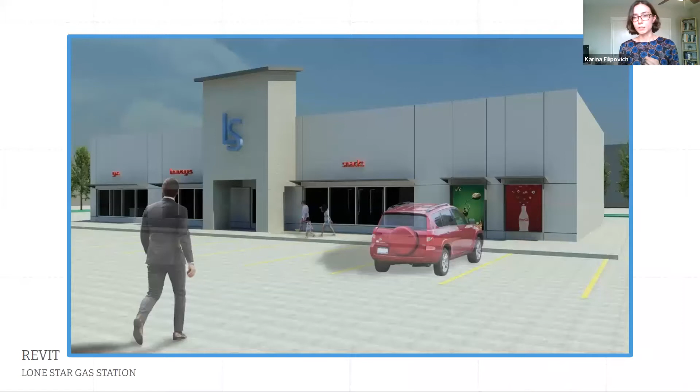And I want to show you guys a little bit of the work I was doing while I was at Lone Star. These are 3D models that are rendered, and a lot of the things I was doing was learning building design, drafting, learning about construction details and plans preparation for construction for like houses, and you see things like this, like gas stations. My goal was to eventually become an architect.

This was just something I was obsessed with, and I loved doing these kinds of things. These models that you see here are what we call BIM models - BIM stands for Building Information Modeling. They're actually the future of construction. The reason why is because these models allow you to create ahead of time what the structure or building or whatever you're trying to construct is, ahead of time, in your computer. And by doing that, you can catch mistakes ahead of time.

So for example, in a building, if you are modeling the building, creating this 3D model, you can also put in that model the ductwork, any kind of plumbing system that you need, what's going to go into the walls. And you can do clash detection with those BIM models. That's been really useful for architects and for contractors. When I say contractors, that's what we refer to people who actually construct and build whatever it is that we need to build - it's a very important job.

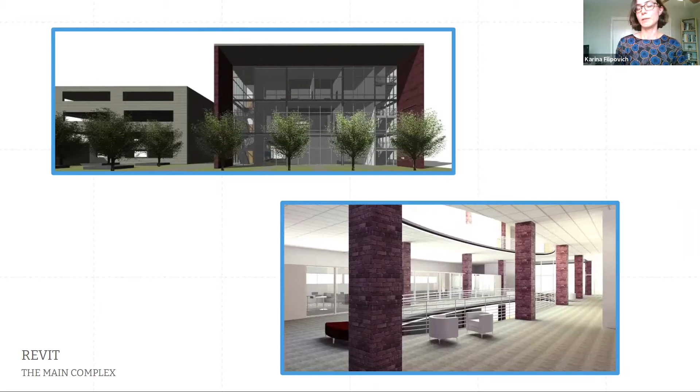So contractors out in the field know ahead of time what to look out for, and we can find those mistakes ahead of time. Now, when it comes to civil engineering, it's similar, but these pipes are in the ground, and you can create models of roads and bridges, which I'll show you a little bit later. So it's the future. These are not the most impressive things you can do with this software, but at the time, it was really eye-opening to me and so much fun. I love doing these things, I love making models, I love using computer programs, I love the challenge it brings.

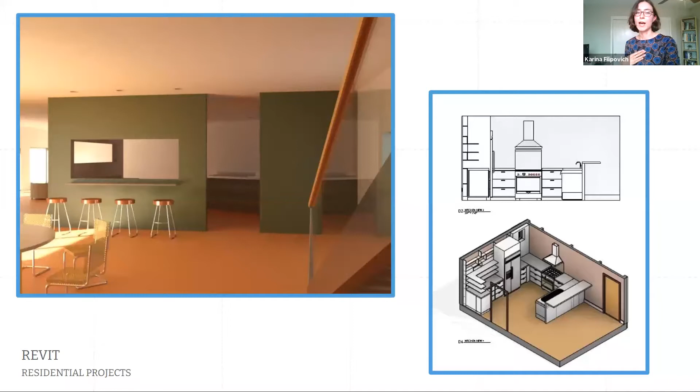So I thought I wanted to be an architect. I was preparing myself to apply to schools of architecture at the University of Houston main campus and Prairie View A&M. They have a beautiful College of Architecture there. So these were the options I was weighing at that point in my life.

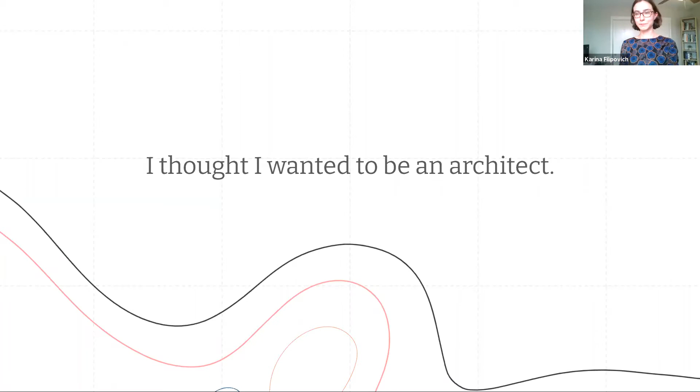I was finishing my classes at Lone Star, and suddenly I came across this class that was required for me to graduate. It's called statics. This is considered an engineering course, or at least an introductory one. I had never taken anything like this in my life. I wasn't sure why I had to take it. I never heard of it.

But the professor teaching that class, that one summer I had to take it, was one of the best teachers I've ever had in my life. He really held my hand through this class. It was like a 5-person class. He would sit down next to me at the desk and say, okay, what are you confused about? Let's do this right now together, we'll go through these problems together. And because of this class and because of that teacher, it's the reason why I'm standing here talking to you today. If I didn't have an experience like that so early on, I wouldn't have continued to study engineering.

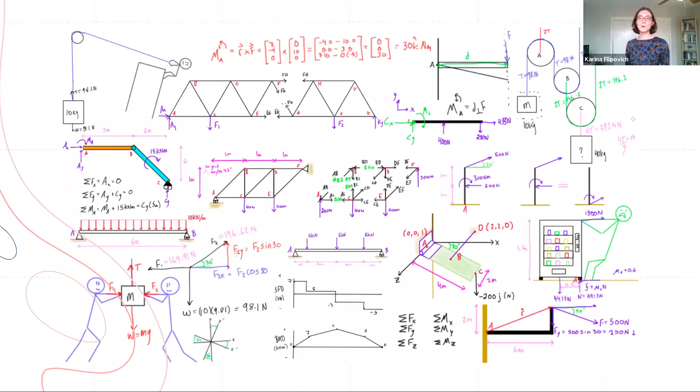Then I went to UHD, and this is the only picture I have of that time. Just kidding, but I went on to study structural analysis and design at UHD.

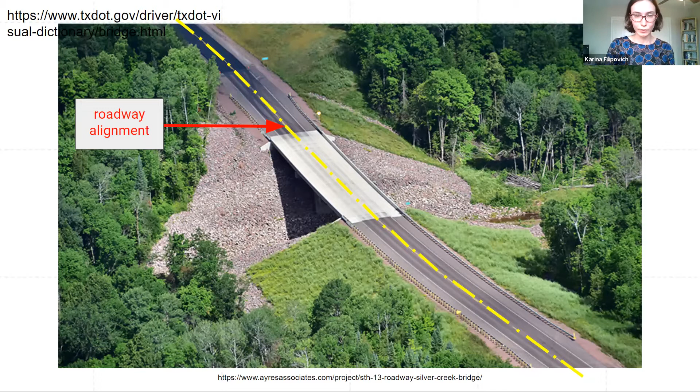And now we're going to go into this bridge. Let's see if I still have control here. Okay, I recreated this image for all of you in a drafting program.

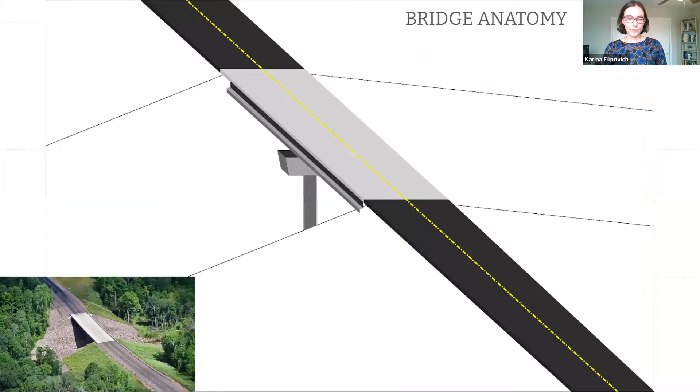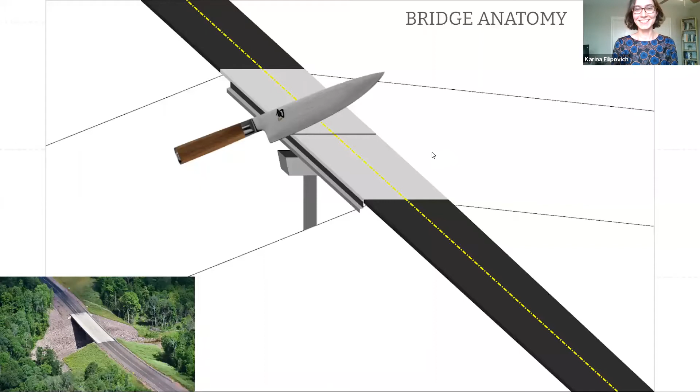In order to take a look at the insides of this bridge, I'm going to cut into it. All right, so I've never done this before, I've never cut into a bridge like this before, so I'm really nervous, okay? All right, here it goes. Oh, it's getting a little stuck there. Oh, almost. All right, we cut into this bridge.

All right, so this is kind of what the bridge looks like. Not every single bridge, but I kind of drew for you what the kind of bridges I work on look like, because that's what I'm familiar with.

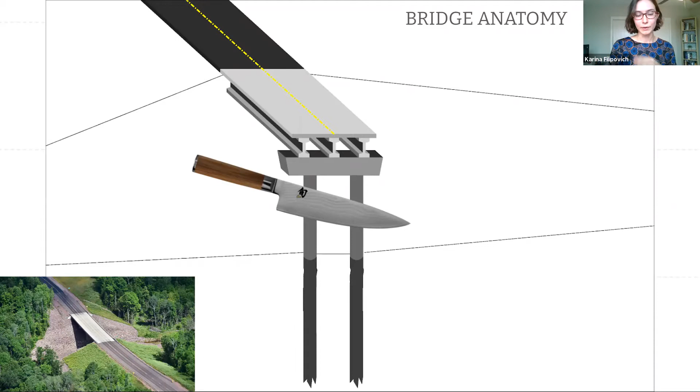Okay, the first part I want to talk about are the drilled shafts. Drilled shafts are primarily used in TxDOT projects, and this is the foundation.

The way we create this foundation is by using a type of drilling equipment. Imagine this giant corkscrew going into the earth, creating this circle, and we excavate that earth out of the ground.

Once we have that giant hole, this huge cylinder in the ground, we place a steel cage into that hole. You can think of it kind of like chicken wire, but a lot sturdier and more up to code. So we put this cage inside, and then we pour the concrete, leaving a little bit of that cage sticking up.

Because next we have the columns. One thing I'd like to mention about the drilled shafts is that these take in ultimately all of the loads from the structure and transfer it into the soil. Likewise with the column, the loads are transferred from the column and then go into the drilled shafts and into the soil, into the ground.

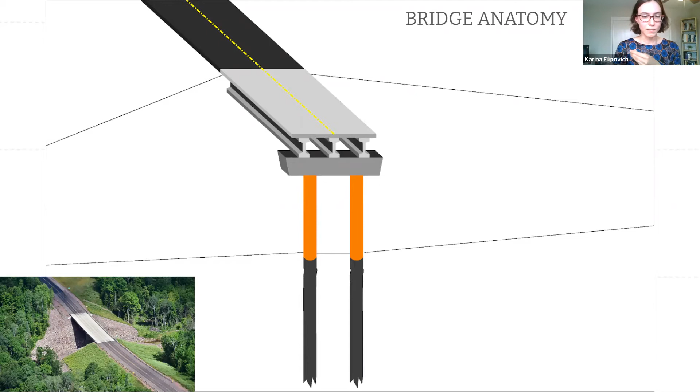So the columns also provide resistance to wind, say you live in a very windy area. And also if it's located near water, like this picture down here at the bottom left, this is a kind of gully of some sort. Perhaps it floods a bit. Columns can provide some resistance to that water flowing.

Next here we have the final part of the substructure. I didn't mention this before, but in the bridge we have different parts that we design. So this cap part, you can call it the cap, is part of the substructure. What do you think it does? It transfers the loads from the superstructure down to the columns, then down to the foundation again. I'm sensing a trend here - each part of the bridge transfers to another part of the bridge.

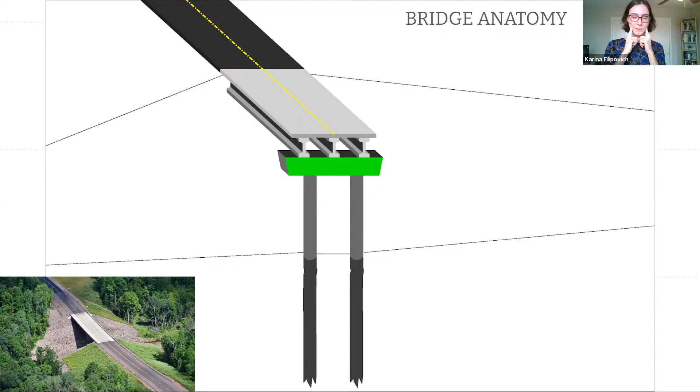Okay, and these - the cap and the columns - are what we see when we drive underneath freeways, right? I think you all recognize this, you all see this part of the structure. I think it's beautiful now when I drive underneath intersections, underneath freeways. I look and I see it all, I understand it. I do all the calculations every day and I just look around in wonder. So hopefully, maybe you will too.

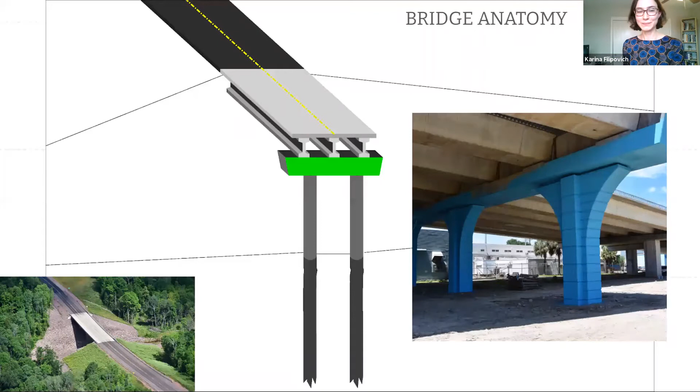Okay, and next we have the girders. There's all different types of girders you can use to design in a bridge, and actually each state has their own beam shape. These are also beams - beams and girders are kind of the same exact thing. These beams hold up the deck, but every state has their own standards when it comes to the foundation, the columns, the cap I just showed you, the girders, and they want you to follow that.

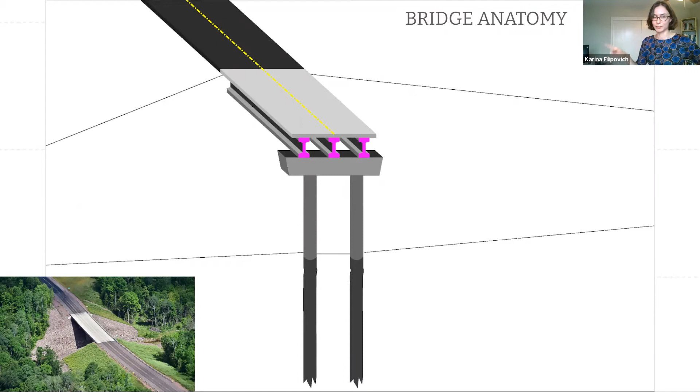Don't make it like they do in Washington, only like we do in Texas. And Washington's like, only make it like we do in Washington. Don't go to Texas and look at what they're doing, because that's not how we do it here. And that's reasonable to a certain point. But once you start seeing the differences, it starts getting to be like, okay, this is just a preference some states have. Some states might freeze and might have different concrete standards and things you have to follow, but it's very strict - you need to make sure you're following what the state wants you to do.

Okay, so those are the girders, and they come in all kinds of shapes. And here we have the deck - this is the part that we see when we're driving around, and it enables traffic to cross. It enables you to cross areas that you otherwise wouldn't. Imagine if you didn't have a deck there, if you didn't have a bridge there, you wouldn't be able to get around.

So I hope that was painless, and now you know a little bit about bridge anatomy. And if you really liked everything I talked about, or if you thought it was really fascinating and you want to learn more, well then I guess that just means you're going to have to become a civil engineer. I mean, you're just going to have to switch majors. Or you can just watch a bunch of YouTube videos after this. But I don't know, it excites me, it interests me. So hopefully you at least came away learning just a little bit about it.

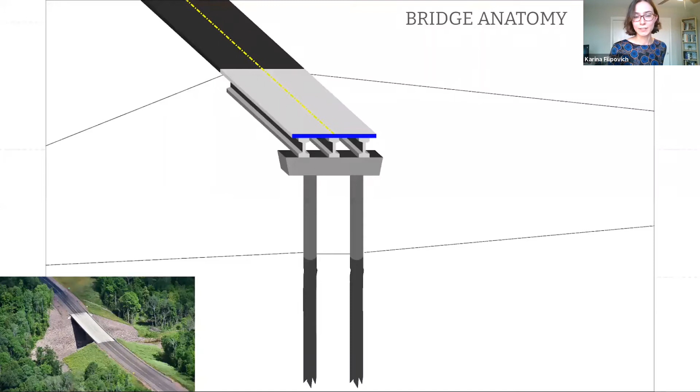So once we design the bridge, we do all our calculations. It's not what it looks like, but something like that.

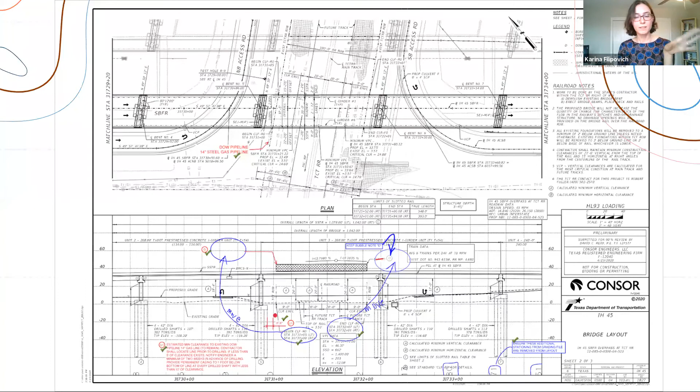We do all our calculations and have to draw the bridge, do 2D drawings of the bridge. This here looks really complicated, almost illegible, no idea what's going on. That's okay, this is a plan view of the bridge at the top, a bird's eye view. You're looking above the bridge, like you're floating above it. This is like what it would look like if you had all of the road parts called out to you.

That's what these little arrows are called, call outs. And you have dimension lines here. I'm pointing to it, but you can't even see. Okay, these are dimension lines, they start right here, right here. I won't go into a whole class about understanding drawings, but it's really important.

We kind of work on the calculations and work on these drawings at the same time, because we have to submit these projects in stages to the state. We have like a 30% submittal, a 60%, a 90%, and then a 100%. We can't get everything done all at once, so that's why we break it into stages. And since we're breaking it up into stages, that means there are going to be errors happening, right? Not everything's perfect, I'm not perfect.

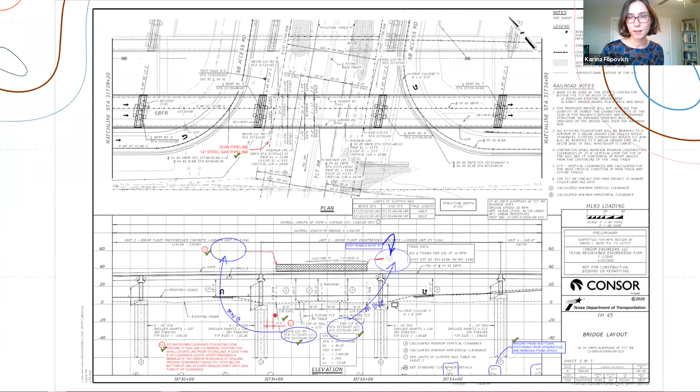And when we find these errors in the drawings and in the plan sets, we call them red lines. You can see down below some blue lines, and you also see some red lines. These are comments and corrections that need to be made to the drawing.

As an EIT, engineer in training, this is one of the best ways that I can get feedback on my work. The senior engineers look at the drawings that I do of the bridges and they're like, this is all wrong. And I'm like, thank you so much, because I love learning and knowing when I'm not understanding something correctly or when I'm displaying something in a way that could be misinterpreted or incorrect. Feedback is a crucial part of growing and learning, and these red lines are one of the big ways that I can learn from my mistakes.

And it's great because you're putting together the math with how things are going to be constructed in reality, right? You do all these calculations and preparations, but then how is it actually going to get built in the field? The plans are just one small part of that. I think engineers are notorious for not knowing how things are going to go and get built in the field, so you'll need to go and get some field experience for that.

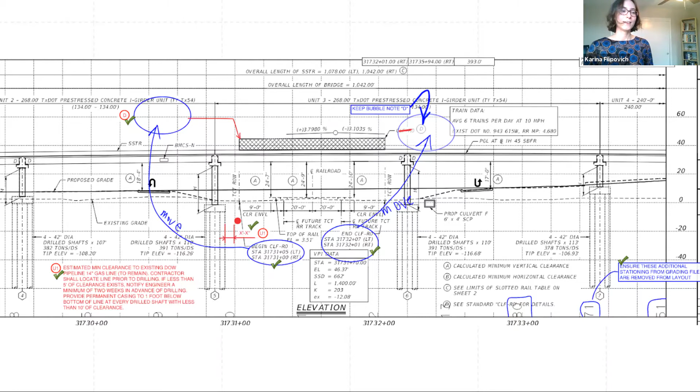But then a pandemic happened and that got sidelined a bit. But I always try to understand everything from every angle, because that's the way you're going to become the best engineer that you can.

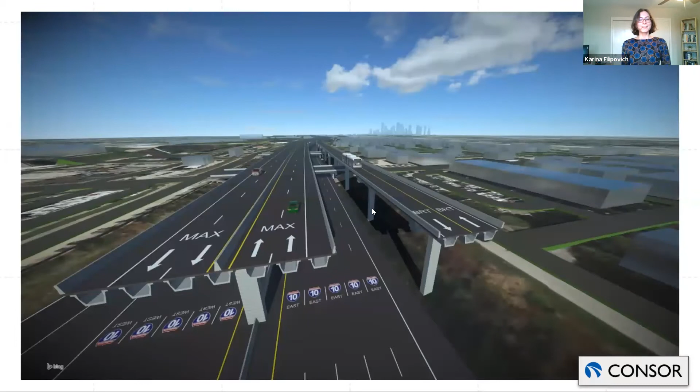So this is what I was talking about when I said BIM models and 3D models and roads and bridges. When you do enough of these things and have a background in 3D modeling, like I studied in school, I made some 3D models. My company recognized that, they saw that I had this background and a passion for making models like this, and I have this creativity inside of me that just wants to burst out.

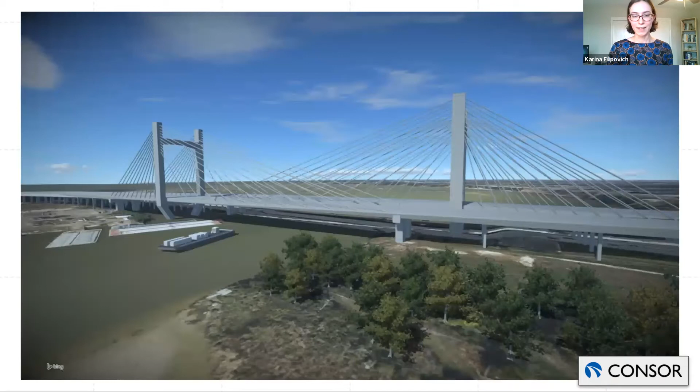So now, on top of my duties as an engineer in training and bridge designer, I also get to work with other engineers across the company. I get to plan out what some of these designs they're making are going to look like. And this is a lot different than making models in school.

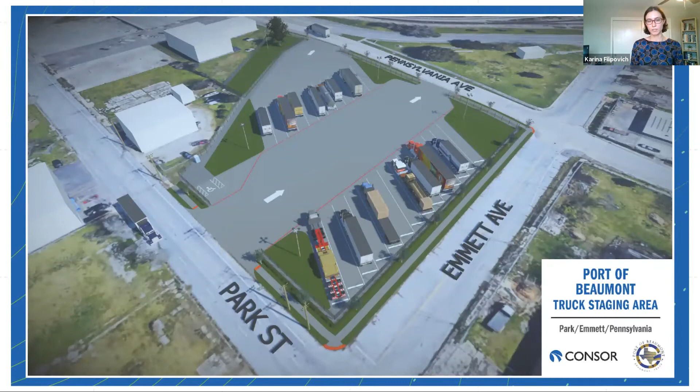There's a lot more that goes into this and a lot more iterations that you have to go through, because these images are eventually going to go to the public, they're going to go to TxDOT. We make these to communicate to the public and to government entities what our construction and designs are going to look like. When people hear construction, they just get mad, right? But that's what this image comes from.

It's to show people what their neighborhood is going to look like after they complete the project. This project started because there were a lot of trucks waiting in the street, polluting the air, idling, all throughout this neighborhood, trying to get into the port. There's no place for them to park and turn off their trucks, and that's where this parking lot comes in. I know, oh, it's just a parking lot, but these kinds of things really make a difference. That's why I'm really passionate about the work I do.

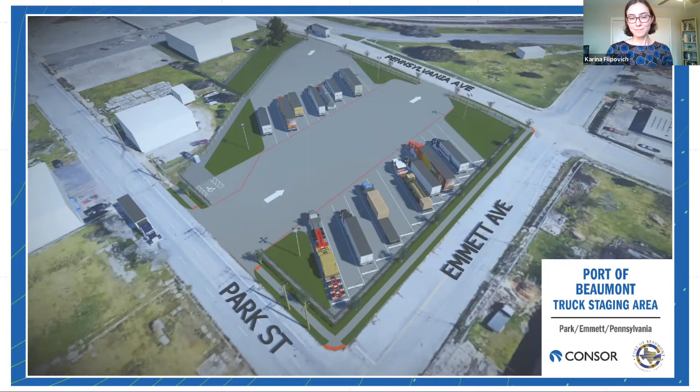It's a lot of hard work that goes into these images, and they're so much fun. I love just sitting there and figuring out the best way to accomplish this. It's like a big puzzle piece, right? I have all these pieces, all these inputs, all these engineers around me saying different things, and I have to come in and create an image that is what they desire.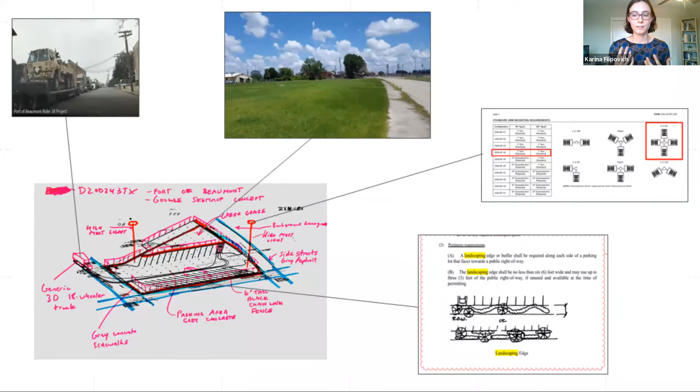And you might be thinking at this point, Karina has her life together. She's doing all these things and she has no problems in the world, and she's just on point, she's got this going on. And the truth is, yeah, maybe a little bit, but...

One thing I recognize is that people say it takes a village to raise a child. But one thing I say is that it takes a village to keep a woman in STEM. I have a support system. I have people who believe in me when I don't believe in myself, because there are times for that. I'm not always confident in myself. We all kind of go through these things, whether you're a man or a woman, honestly, if you think about it. And I had a lot of people along the way to help me out, but that's because I reached out, and I'm continuing to reach out, even in my professional life.